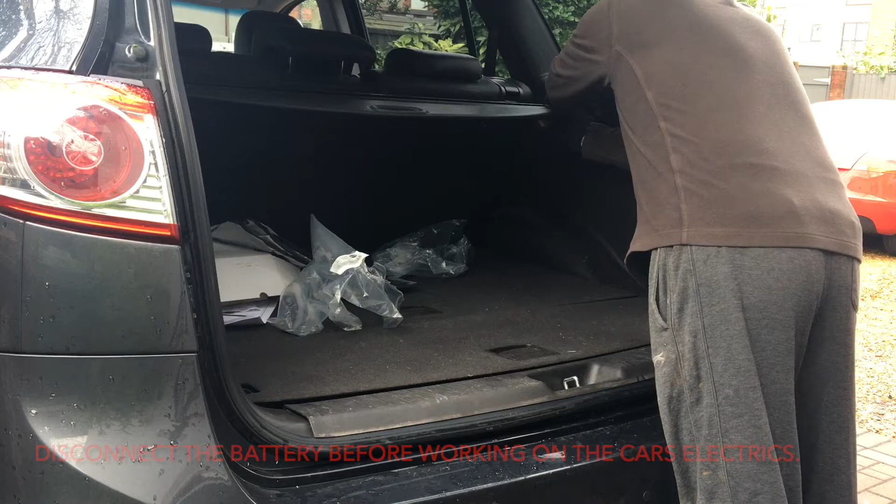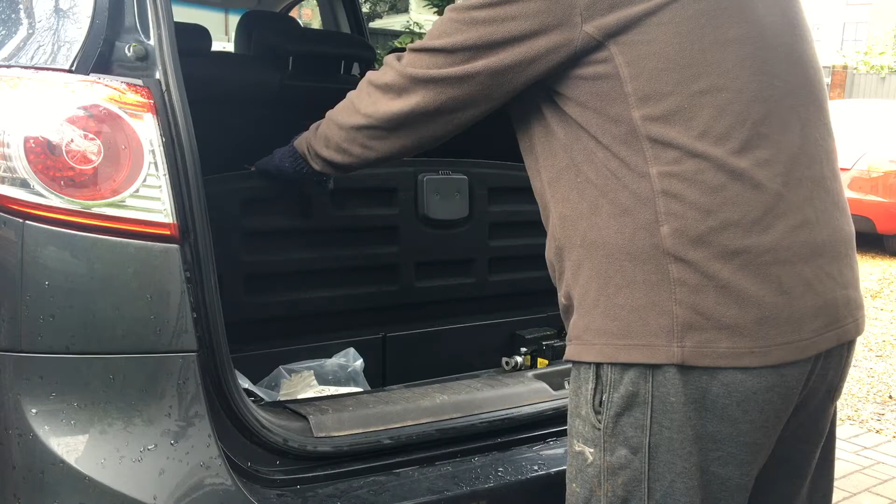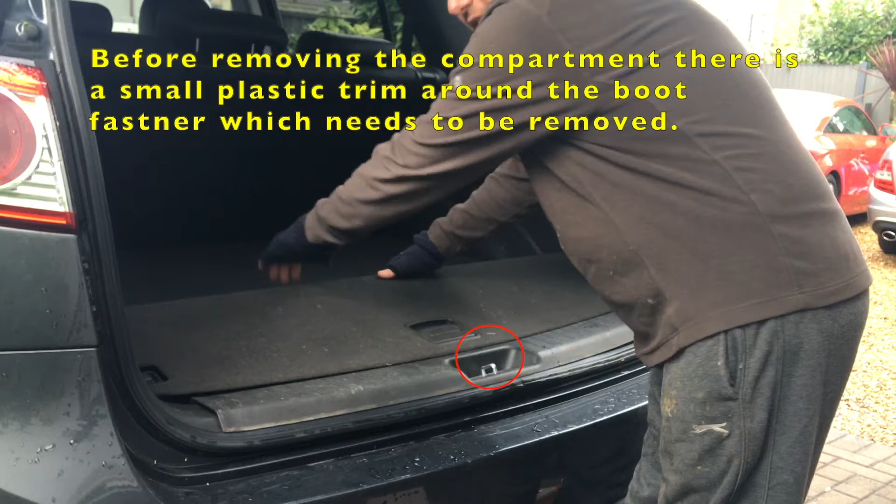Now remove the parcel shelf, then if you haven't already, remove the jack and wheel changing tools from the smaller compartment. To take this out, there's a screw just under here and one there - it's a 10mm. Then just yank it from the back and it'll come out. This one's already loose, or you may have some here. This is the first time we've had this little compartment off.

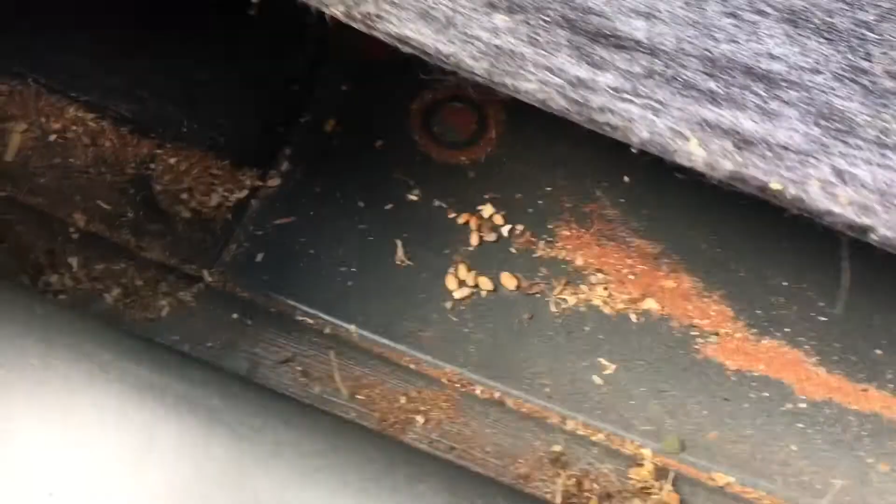As you can see, we've only just bought this car and it's full of what I think is brick dust or building sand. What else have we got in here? We've got some seed. It kind of gives you a history of the car, so we'll give it a clean out while we're here.

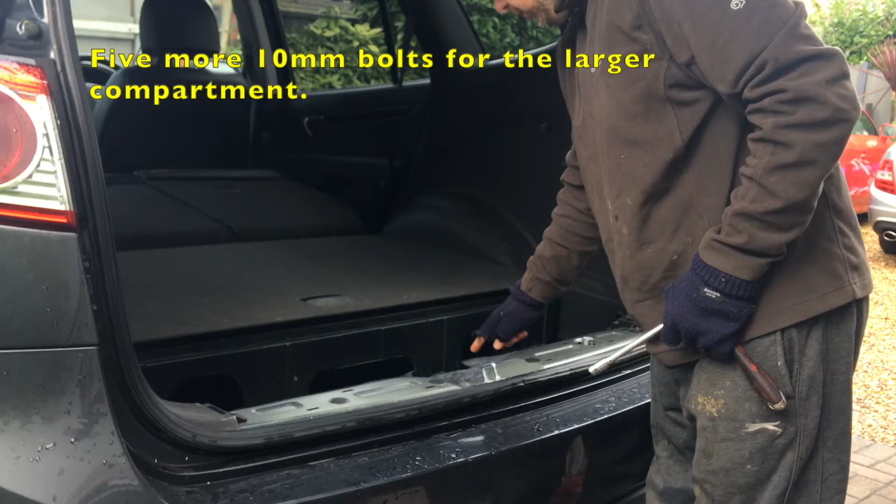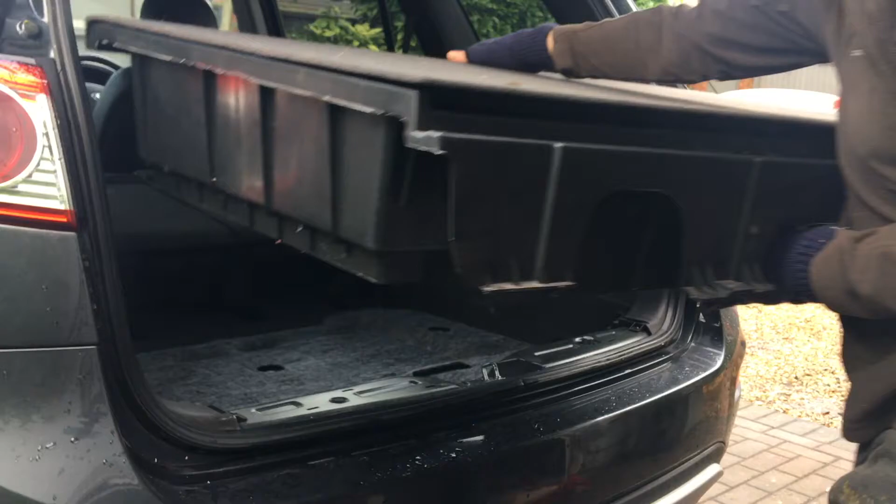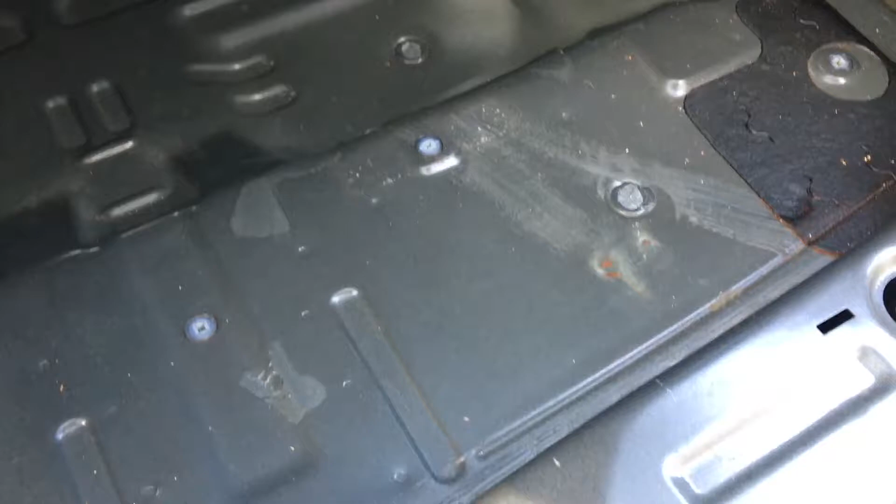Three more 10mm there, one in there, one in there. Once you've got the two storage compartments out - you don't have to take this out, but since I'm cleaning up underneath I already started - we'll take it out and give it a hoover out, and get this side out too.

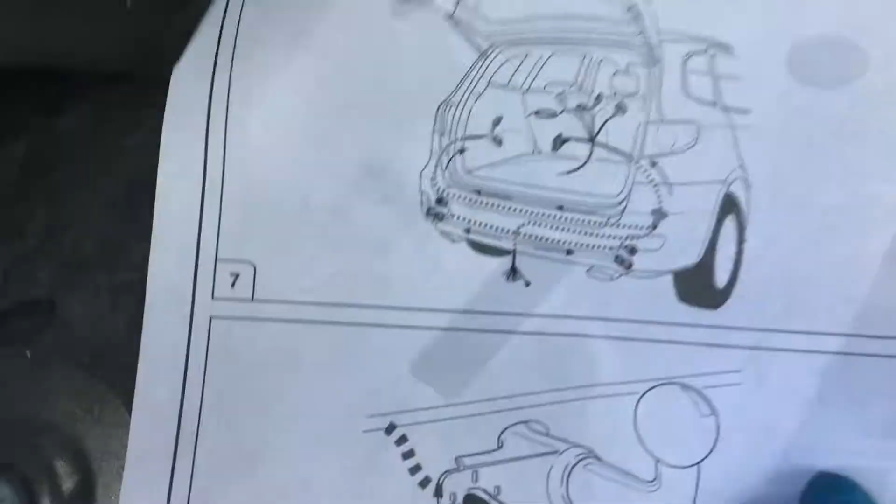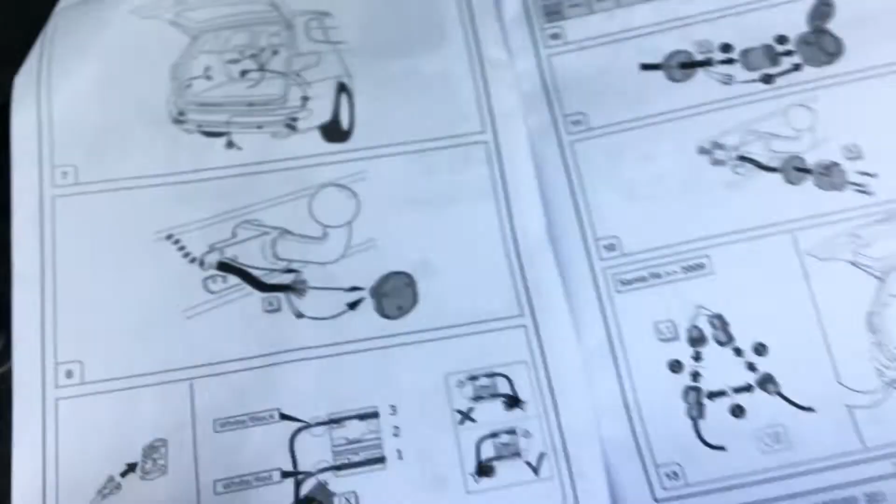According to the instructions, they suggest bringing the wiring in from the outside. Looking at some of these connectors which go to the inside, I tried that and it will not fit through the hole under here - you can just see it, there it is. So looking at the connectors that go to the outside, they all look a lot smaller, so I'm going to try it that way. That worked much better, bringing it in that way. It's there now - I put a little silicone grease on the grommet to get it through and seated.

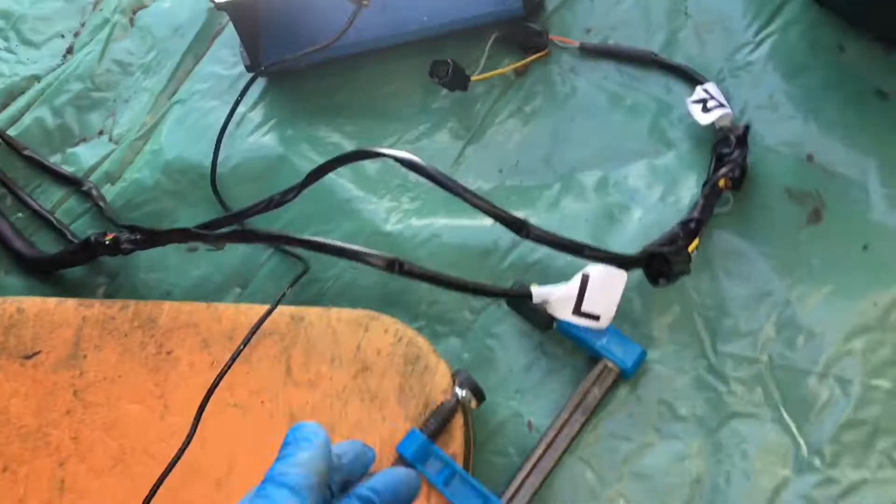Now I can get it wide underneath in order to get it to the tow bar, and then up there is a channel where there's already wires running through. I've put a piece of twin wire through there, which comes out on this side and runs up to what is the fog light.

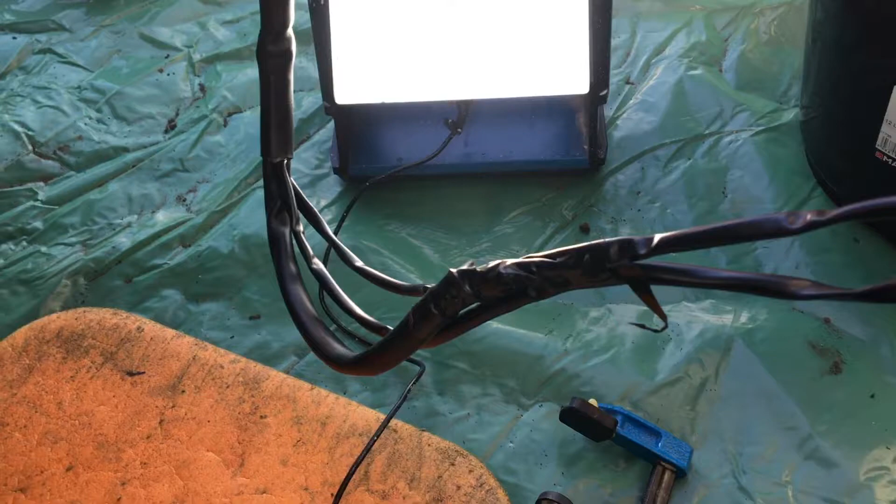So we're going to attach it to that and pull it through. What I've done is taped up all the wires with electric tape, hopefully to stop them snagging, and see how we get on.

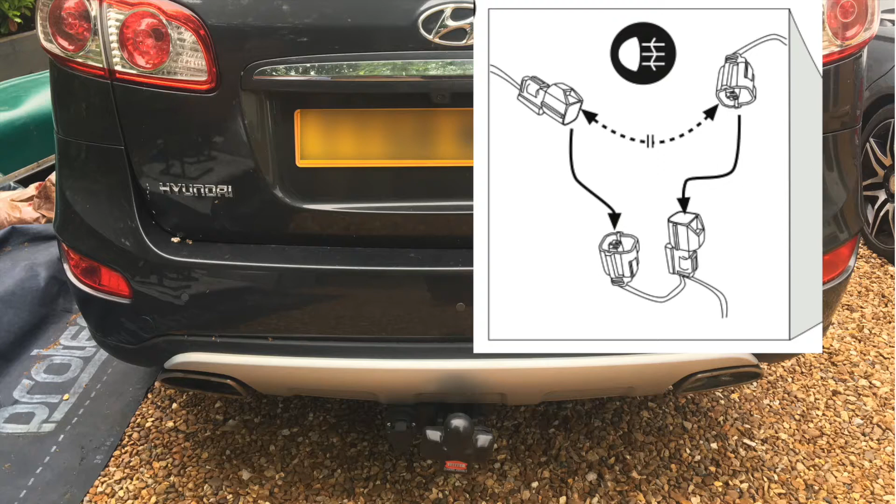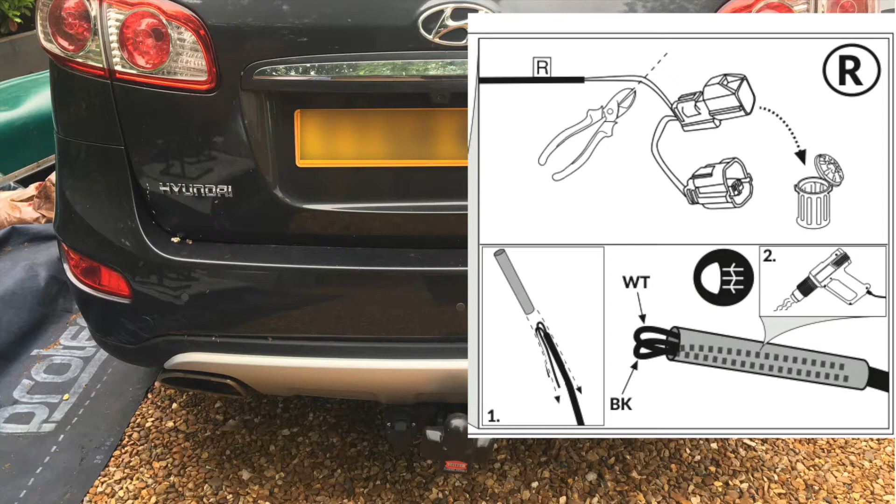Once you've traced the fog light wires under the bumper and tow bar, you'll want to connect them - it's a simple connection that splits into the existing harness, as shown on the diagram. Depending on your model, you may only need to go into the one on the passenger side, or you may need to connect both. On the one I did, I just needed to connect it on the passenger side, and the connectors from the harness for the driver's side you simply snip off and tape up. So you can see that's where I brought the wiring in, just there.

So now we're going to undo that.

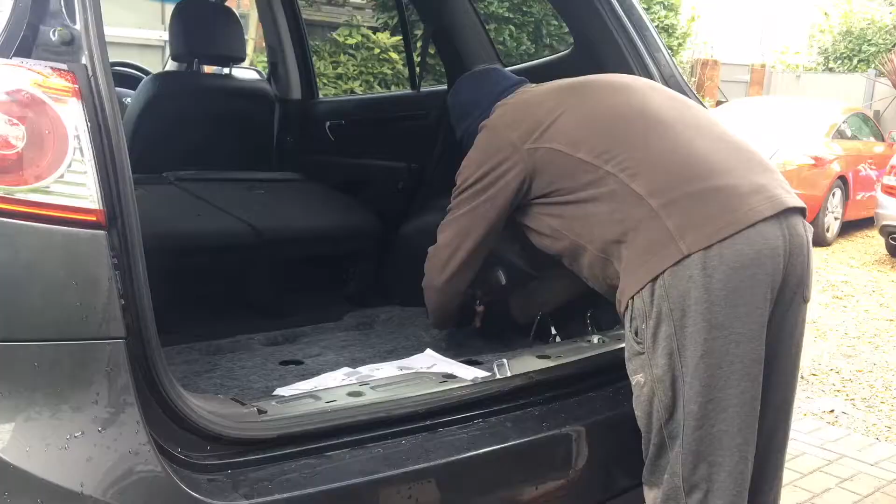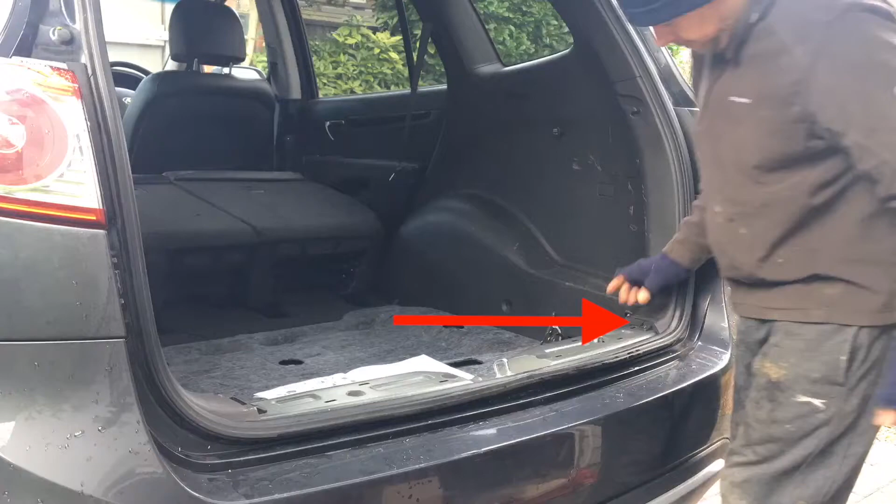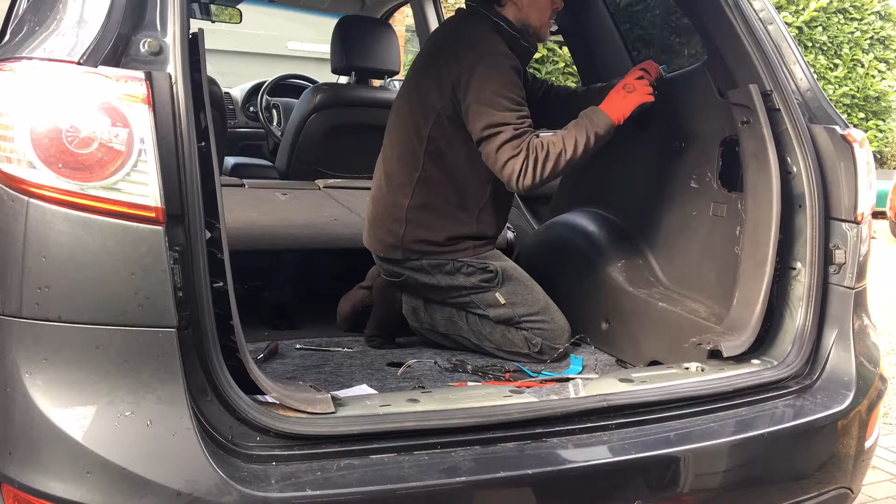The rear side panels are a bit of a pain to take off. There's a Phillips screw just at the back on the lip, and then two 10mm in the boot. Then on the back doors you've got to take the kick plate off, and also the seat belt where it mounts to the car at the bottom. Once you've removed all the fasteners, this is the trickiest bit - the clips that hold it on just underneath the rear window are quite stubborn and take a bit of persuading, but basically you're trying to lift it slightly and pull it out.

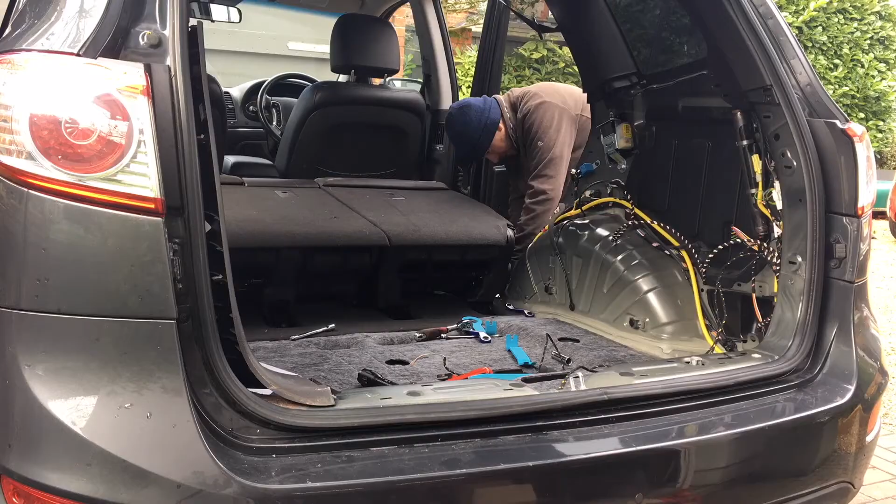Eventually got that rear panel out, which was an absolute bastard.

All basically to trace the grounds, which are there down to that lot there, and then you can carry on with what I presume to be this feed, which goes to the fuse box at the front. So we trace that down. I've taken our little kick plate off, and now we've got to start weaving our way through there.

After struggling a lot on the other side, I finally got a system. You take off the two 10mm and the little Phillips head there, undo the seat belt from down there, which I've just put up there. It's a 14mm, and then you can pull these sides out a bit, and on this side remove the rubber. But then it's these bits up here which are an absolute nightmare to get off.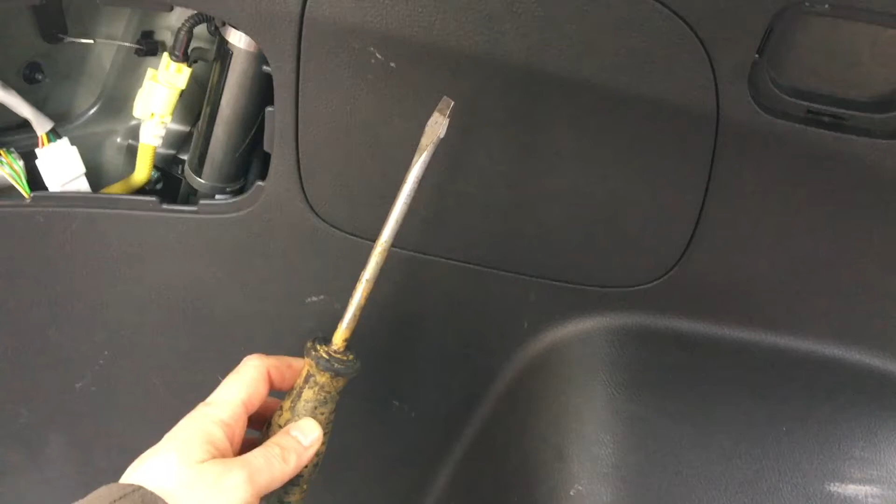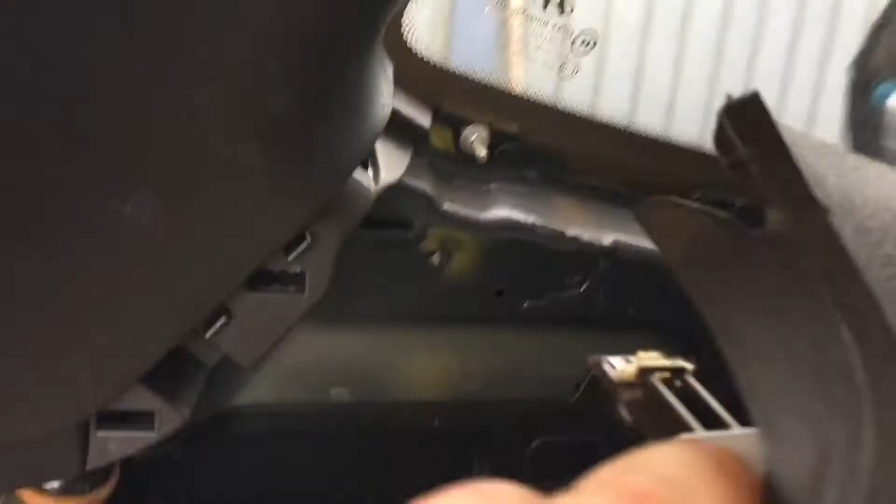What I find best to do is get a long flathead screwdriver, put it up there and push against this bit, and push down on that while trying to pull it out at the same time, starting at the back - that got it loose, and then it just wiggled free after that. Because if you look how the tabs go in, you're trying to get it unhooked from this top bit, and it's the same on this side. But yeah, that was tricky.

So at the moment it's pretty bare.

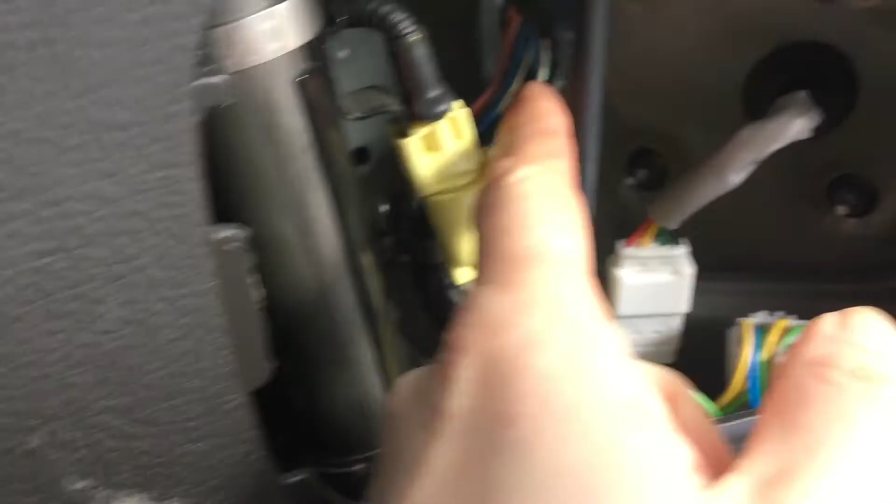Now in the instructions it suggests you've got to find the blue reversing light, which is this one up here. Well, there's two. I hope there's only two, because they go up and into there, because the reverse light's actually in the tailgate, so I'm presuming there's one for each side. That's what I'm hoping anyway.

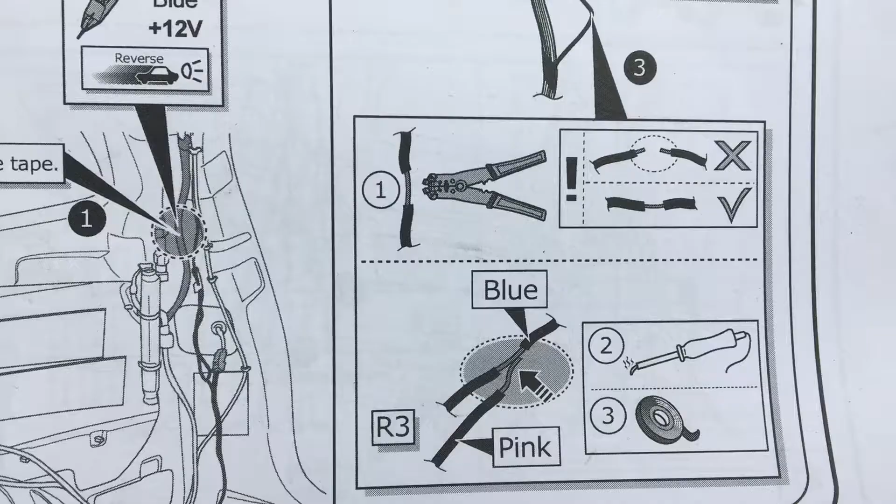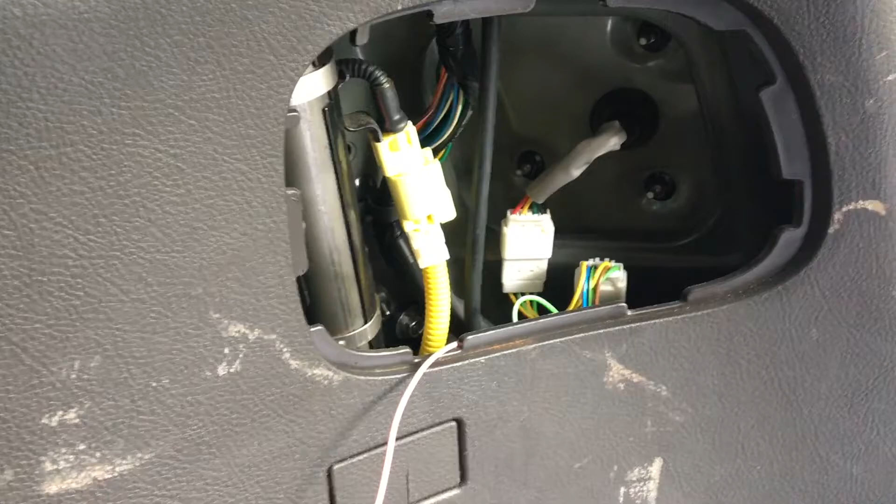Now, as you see, they say strip the wire, don't cut it, and then solder that in. But instead of doing that, I'm going to use, hopefully if we find it, one of them, which allows me to just put the end in and then crimp into it. So we'll see how that goes on. There we go, we got that on. Tuck it up a bit more. So that's that done.

So the next thing to do is attach whatever M is. Let's have a look. Still, I'll tell you what it is over there. But anyway, so we'll attach that. I imagine it's...

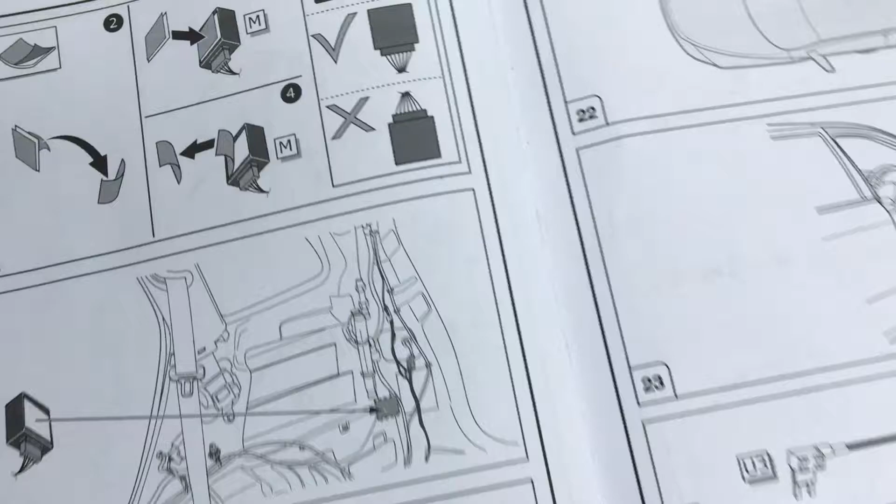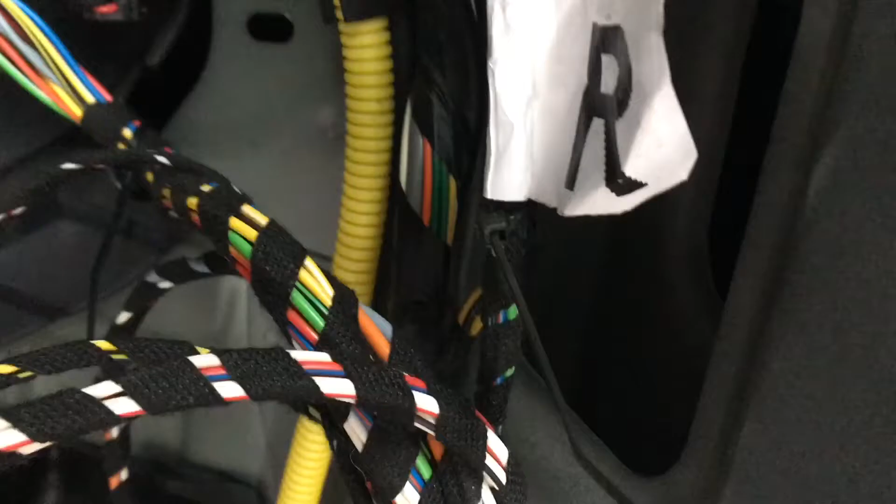So it's just with some double-sided tape, and it's just putting it under there, and it connects. So I've actually put it, look, on that panel there. I connected the wires in, and if you look just there, there's a hole, so I've just put a cable tie just to hold it in place. And I've put another cable tie, you can see that, just there to hold that up a bit. And another one, I've attached the cable tie down there onto the existing wiring harness, just to keep it all in place.

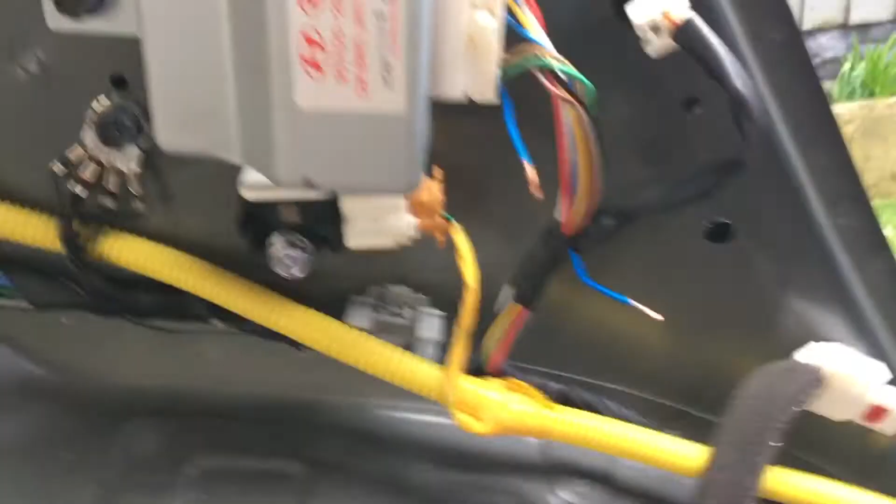Okay, so this is a scary bit. You've got to cut into this wire here. I can see it better there. This one.

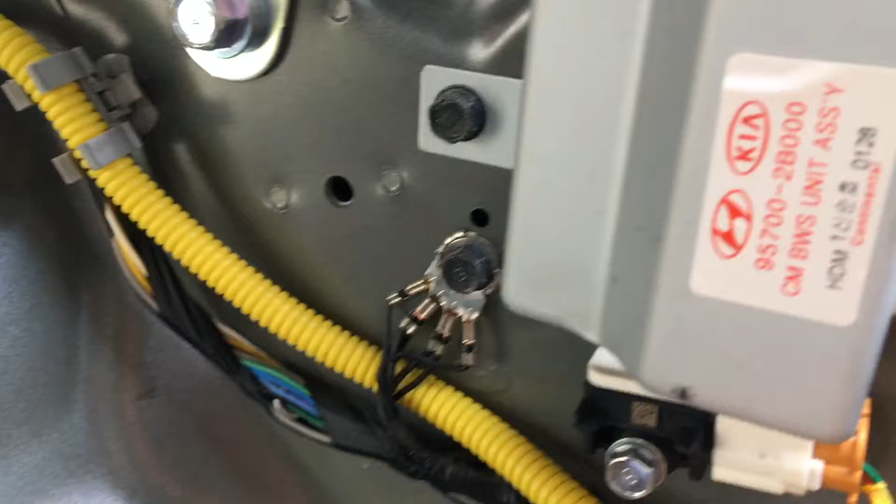Solder in these two. What do you say here? The white and black goes in on that side, so straight to this control here. What's it called? Well, CM's a make model, BWS unit assembly, and then that one goes to that.

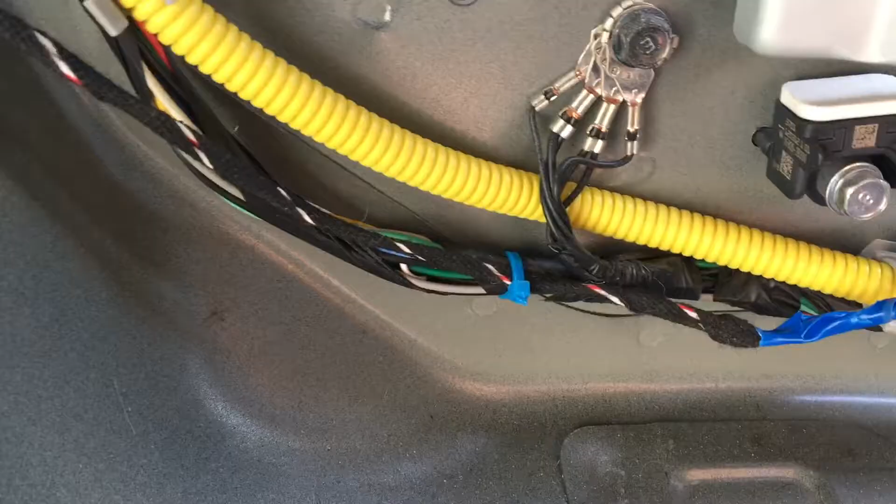Okay, so soldered that in, taped it, not the best of jobs, but it's fine. And then we just put some cable ties down, need to cut the ends off of there, down there, and we're going to route it, we're going to hoover all this out.

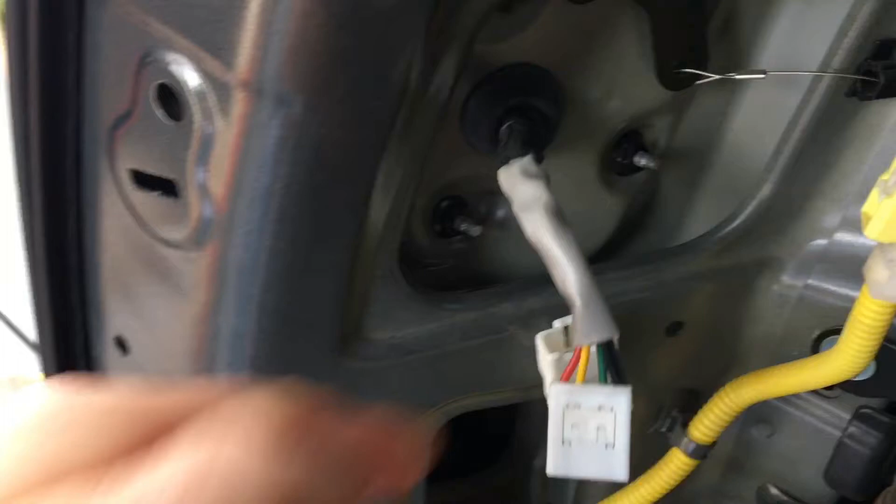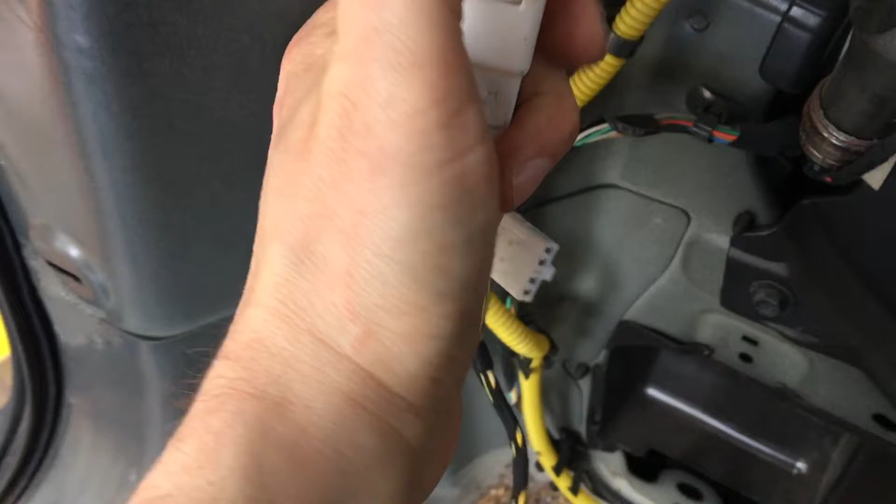So this is quite a straightforward bit, same on the other side, I've actually already done it. You disconnect this existing wiring, like that, and then you can only put it back in one way. This is a new wiring harness, and that connects into... not easy trying to do this, but here we go, so there we go, and then that's that. So they're quite straightforward bits.

Okay, I had forgot to video this bit, but this bit is separate, and this is a bare wire at this end, and then this splice connector to connect them together. I've just put some tape around it as well, just so it definitely doesn't come undone.

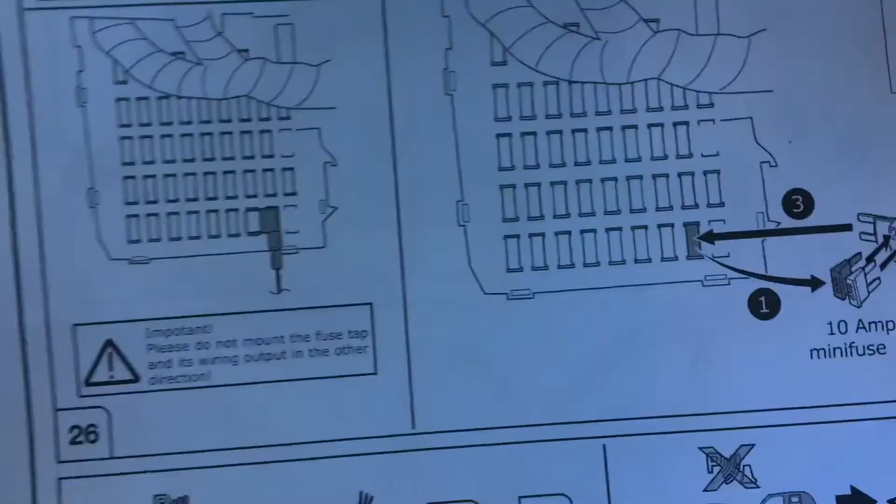And this is a wire that comes into the fuse box at the front, and now we just need to put it onto... please do not mount the fuse tap and its wiring output in the other direction. Right, well there you go. So it is, so that's what we're going to do. So we'll work out that and we'll show you when it's done.

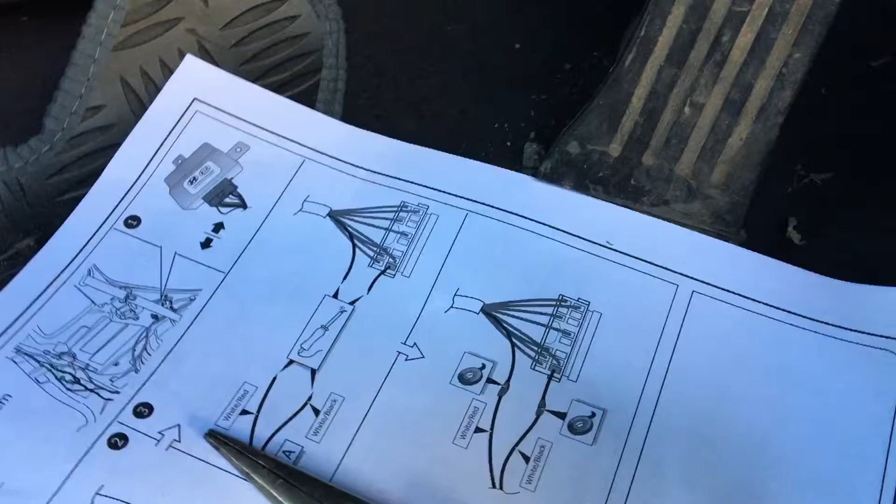Okay, so we'll put the fuses in. You have to push them really hard to get them in. So the 15, which is the original one, goes nearest, and then the 10, which is the one they supplied, goes in like that. So we'll put that in.

Although, again, this could be tricky trying to do it. Alright, we're going to have to stop. So it's a little bit of a tight fit. You can see that down there against the sound deadening, but that's what it is. So that should be good. So we can pop that back on.

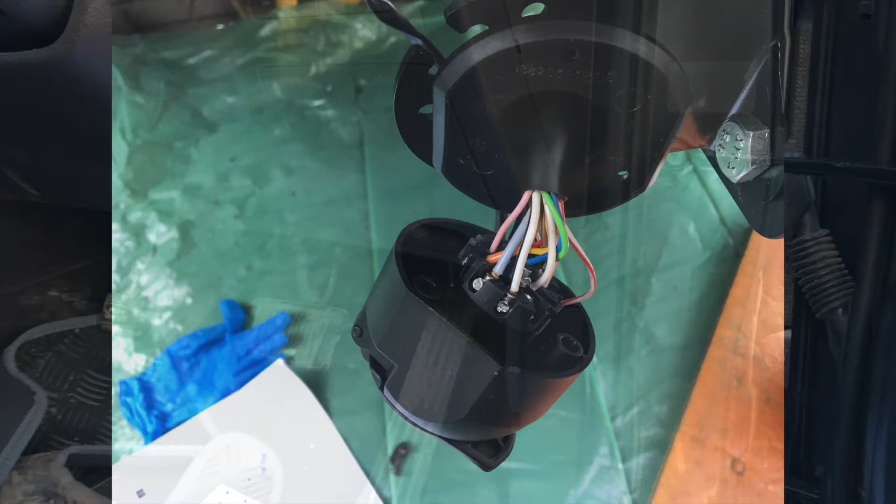There we go. So that's all the wiring done inside the car.

Now you need to bring through the last group of wires from under the bumper through to the tow ball plate, which you can see in the diagram. Then bring the wires through the rubber weather grommet, connect the wires to the rear of the socket. If you have rear parking sensors, you will also need to connect the extra wires which you can see in the diagram. These are deactivated when you plug into the tow bar socket. Once all the connections are made, you need to bolt all the socket components together, including the socket cover to the mounting plate. And that's it, you're done.

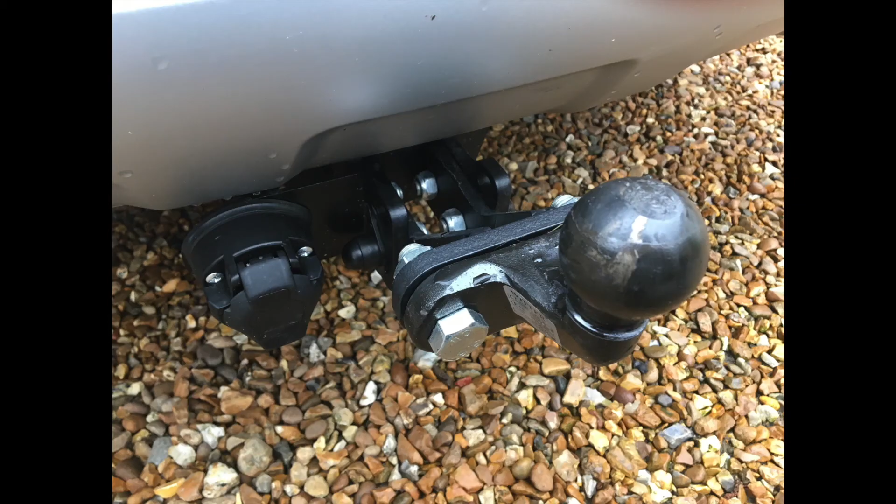That's all the wiring done. Now you just need to get all the trim back on, which is just the reverse of how you took it off, and that's it.